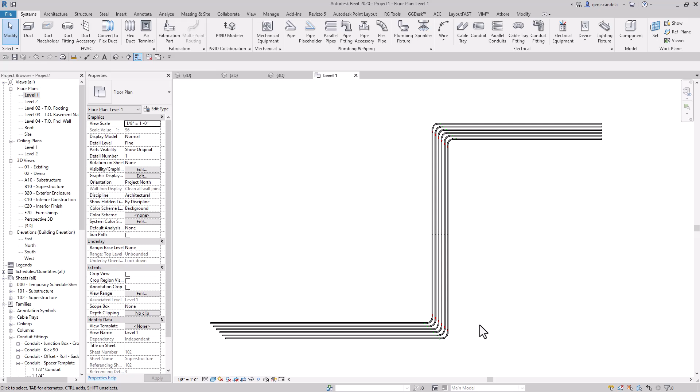All right, today's video is not a tip or a lesson, but about the possibilities of creating conduit fittings that can do all the bends. So basically I have two fittings to rule them all.

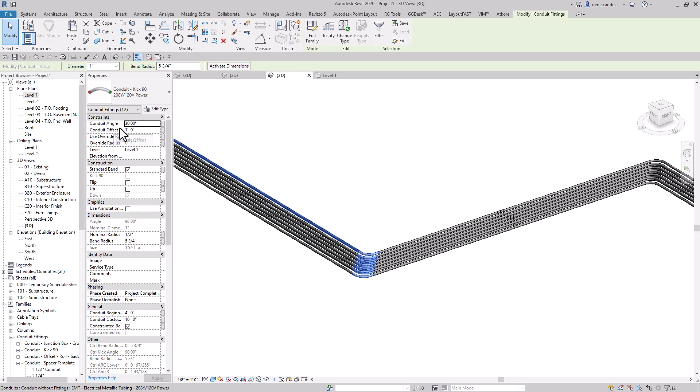Not one ring to rule them all, but two fittings to rule them all, which is a bend and a coupling. And what I accomplished was for the bends, as you can see here, I can change it to a standard bend, turn it off and turn it into a kick 90. And I can flip the kick 90 from the 90 to the kick here, and then I can flip it up. As you can see, it's pretty simple.

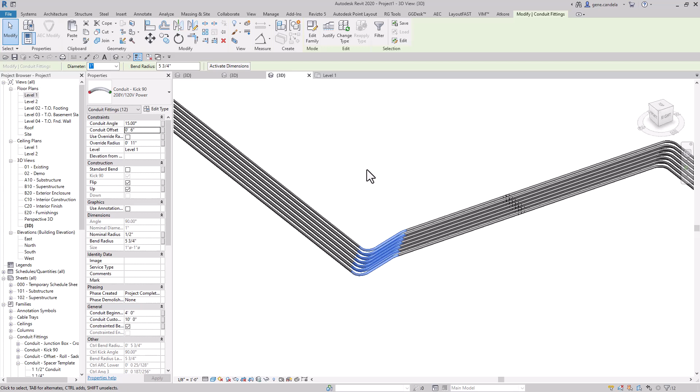And I can adjust the angles here. I can say 15 degrees. The offset, change that to say 6 inches. So that's basically for your bend, your 90 degree or whatever, your elbow basically, okay?

And then I've got these couplings here that can pretty much do every straight bend that you can think of. For example here, I've got it set to coupling and I'll change it to offset. I can flip the offset up, and then change it. All right, so we got the offset, let's say it's down here for right now. Then I can change it, let's say to a 2 foot offset, and let's say I want to turn it into a rolling offset.

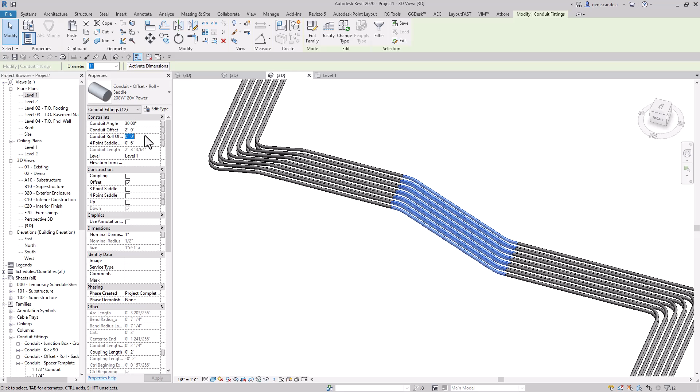I'm gonna slide it over 1 foot. If you want to swing it the other direction, you got to go to plan view, and then you can select it. That's kind of a tedious thing, but it's the only way I can get that to work. I just flip them over. Make something pretty, a pretty shape there.

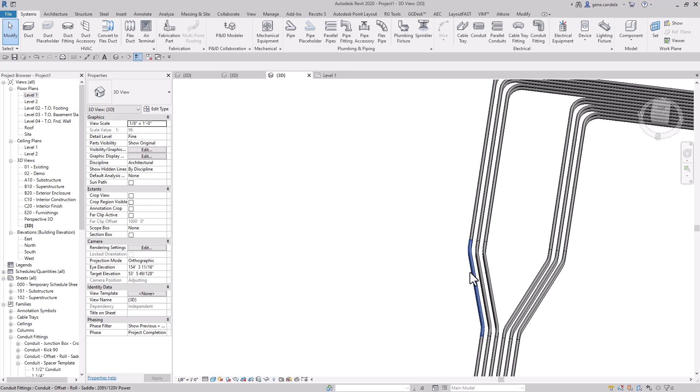All right, so for example, now let's say I can change it into a 3 bend saddle, and actually can do a 3 bend saddle with an offset or a rolling offset. I'm gonna change that back to 0 though, that looks kind of goofy. Okay, and let's change that real quick to say just a foot.

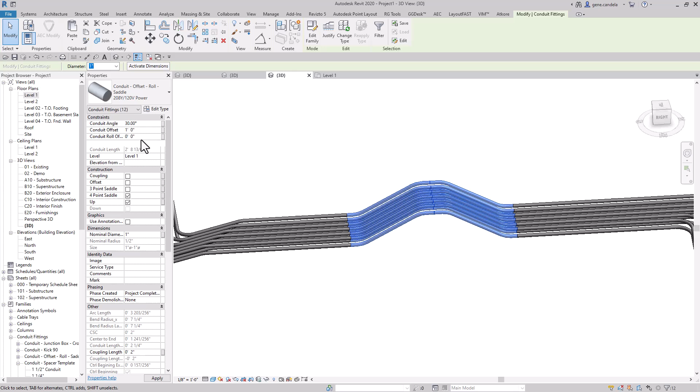All right, and if I want to turn it into a 4 bend saddle, all right, and of course I can flip it up if I need to. So I'll change it to a 4 bend, and then that flat spot there, you can change that. So let's say I want it to be 2 feet long. All right, and then I can flip it down if I need to.

Okay, so it is possible to make fittings do all the bends you want. These aren't from any company, I didn't have to pay for these things. These are just RFAs that I built for our company, and as you can see here, they can pretty much do anything you want them to do.

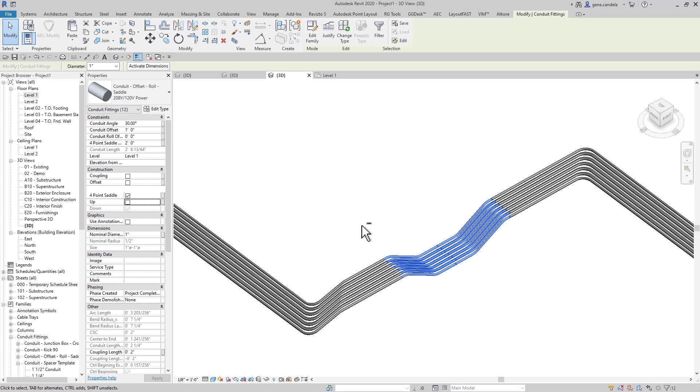All right, so they are kind of complicated to build if you're not good with trig and good at building RFAs. They are kind of complicated, but it can be done. There's just proof right here that it can be done. All right, until next time.